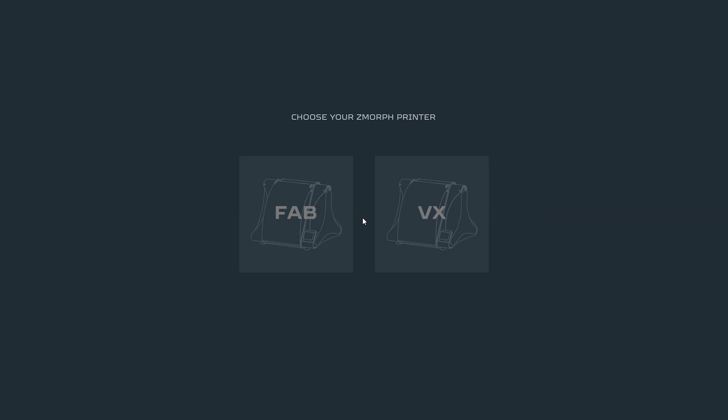Along with the premiere of Zmorph Fab, we also worked on upgrading our dedicated software Voxelizer into 3.0 version. It comes now not only with more user-friendly UI, but also with fixed stability and performance. Let's see how it works.

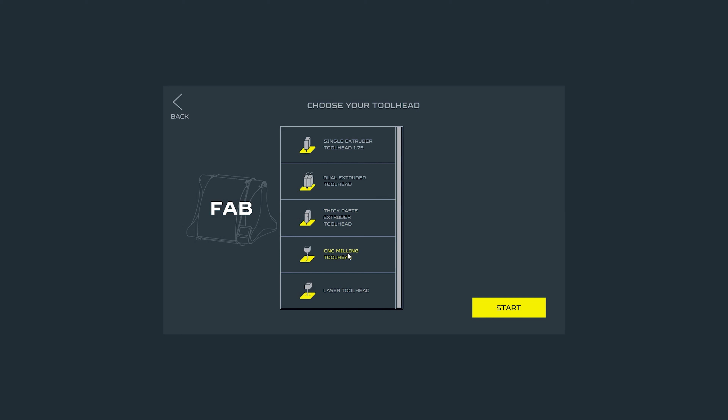We will start with selecting proper setup for Zmorph Fab. So first, select Zmorph Fab, then choose the toolhead from the list. In this situation, it will be CNC milling toolhead. And after that we can press start, since there are no additional options.

Now we are in the CNC milling workflow. First thing we always have to do is import the file that we want to work with. I will import the example file for this video.

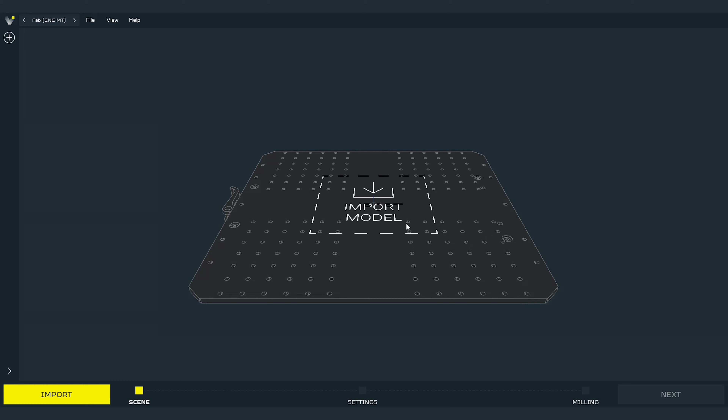This workflow can operate on 3D models, as well as on 2D files like DXF paths. To import the file, press the big button Import Model in the center of the workspace. This video will be about 3D milling operations, so I will import the STL file.

After loading the model, we can see that the model is in the wrong position. The software also tells us that the model is too big for this workspace. I need to transform the model.

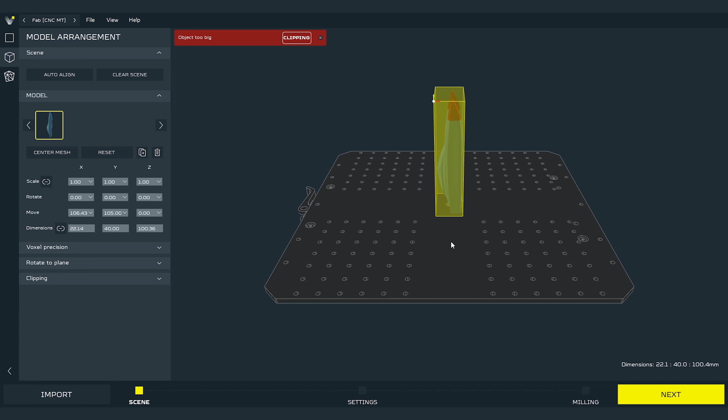I will rotate it to place it on the bottom face of the boat. To do that, I can use the Scene Mode transformation tools. Let's take a look at how it's placed now. I can grab and drag the model to the position I want it to be at.

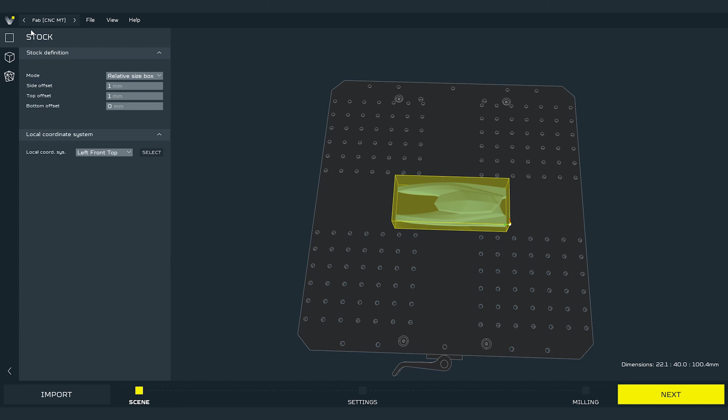Let's take a look at the stock, which is the yellow box around the model. This is a virtual representation of the material that we will mill to get the model. We can set the stock in two ways.

First is the relative box method. In this method, the box adapts to the size of the model. I will scale up the model now to show you how it works.

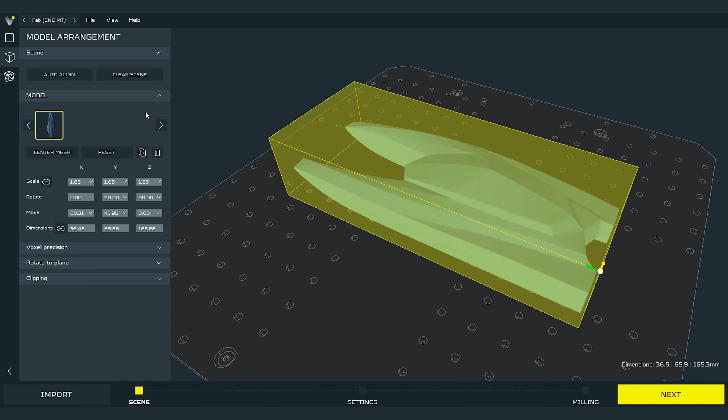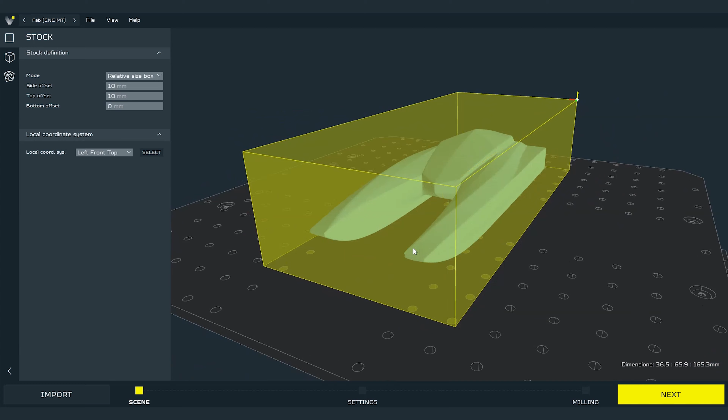You can also set an offset to add extra stock around the model. Let's scale the model back to the original size.

Second method is the fixed size box. In this method, we simply set the size of the stock by giving the values and setting the position of the model inside the stock.

I will change back to the relative stock since it fits me now.

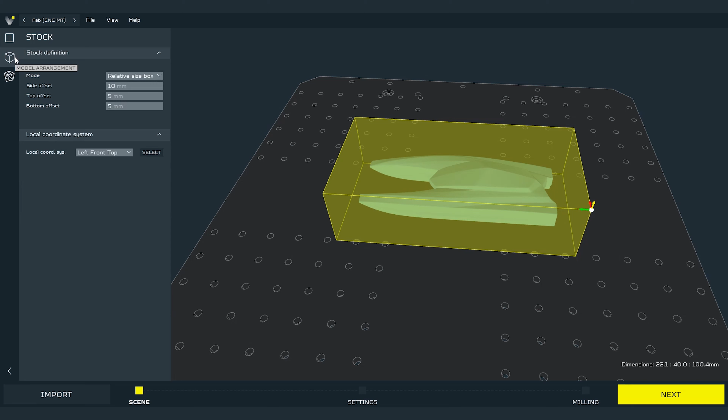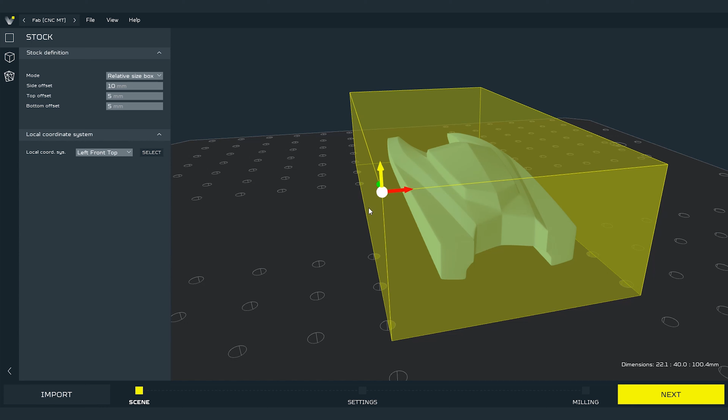Here, in the scene mode, we also set the so-called local coordinate system. This is nothing else than the spot where we will physically set the zero position of the toolhead before we start the work. In regular practice, we set the coordinate system to the left front top, and it will be set as shown on the video. Now, when everything is set, we can move on to the settings section.

Press the button named Next to proceed. This is the settings mode. Here we can set the settings for the 3D milling operation. Looking from the top of the settings column, the first parameter to set is stock material.

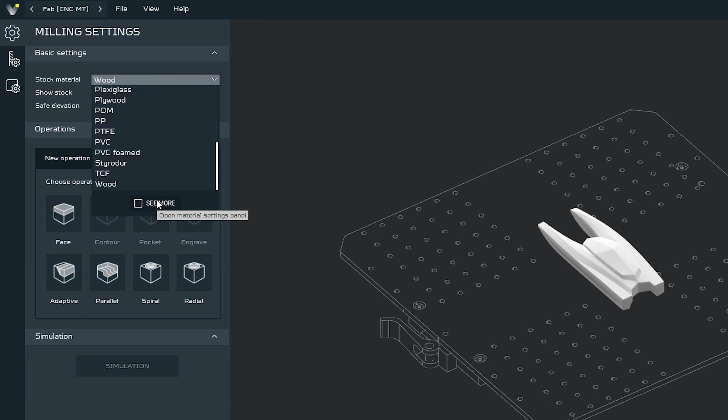In this parameter we set what kind of material we have mounted on our CNC work table. We can either choose from a wide range of preset materials or add our own by clicking See More at the bottom of the list. Here we can duplicate an existing preset or add a new one using the Add New Preset button.

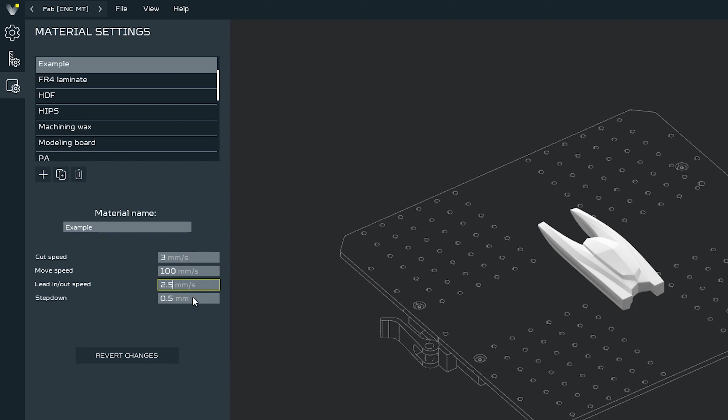We can name the preset and set our own parameters. Then we can go back to the settings and select the new preset from the list. But in this example I will go with the Wood preset, as I'm planning to mill in wood.

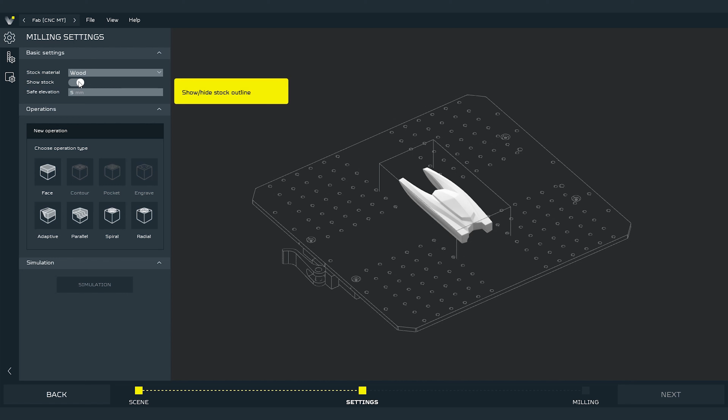Next parameter is a toggle option that shows or hides an outline of our stock material. Turning it on might help us visualize what is going to happen during the milling operations.

Next one is safe elevation. It tells the toolhead how much it has to rise for jog operations to make sure it won't hit anything on the workspace during movement. I will leave it as default for safety.

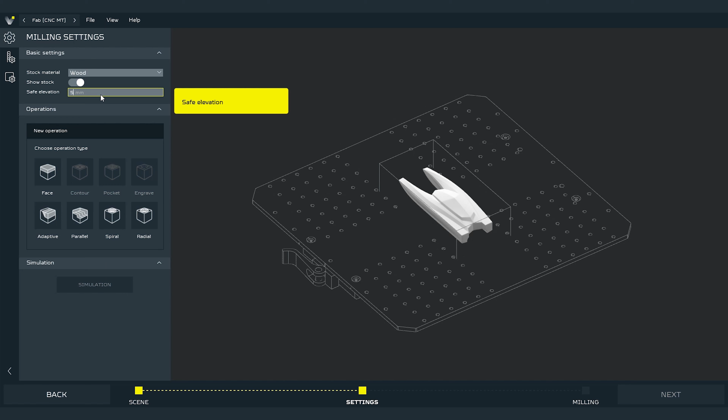First milling operation that we will use is face milling. This operation allows us to prepare the raw stock surface for machining. It removes material from the top surface of the stock to the top of the model to remove roughness.

First, I choose the operation, then I select the face contour. In this example, it will be the stock, and we press continue. New settings will appear; we will leave the starting height and final depth as they are.

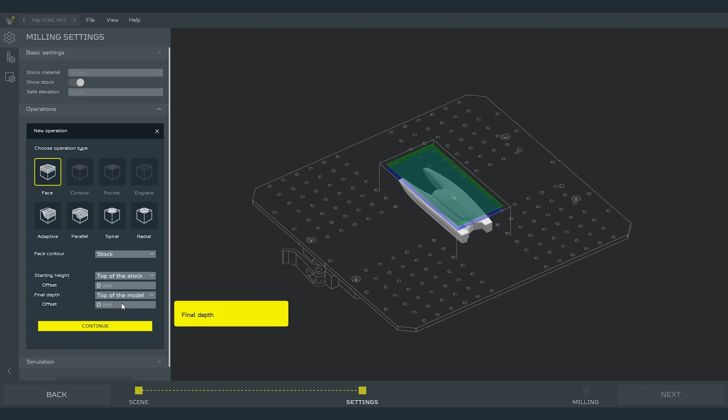Before we proceed, we can take a closer look at the model. The green rectangle is the start of the process and the blue one is the end height of the process. In this kind of operation, all material between those two rectangles will be removed.

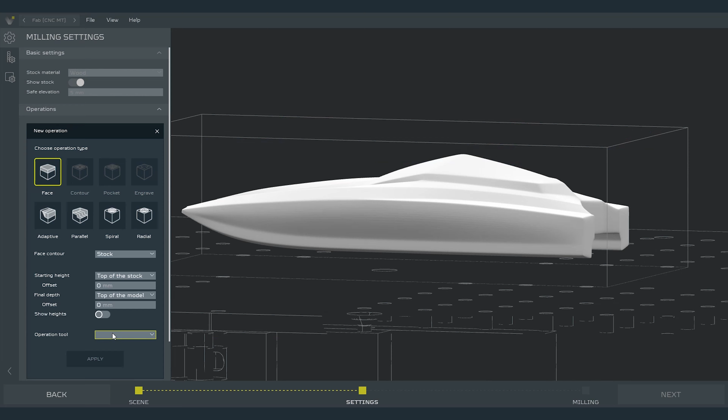Press continue. After that, we have to select the end mill that we'll use for this operation. After selecting it, the software will show us the toolpath. Red lines are where the milling will happen, and the blue ones are the jog movement.

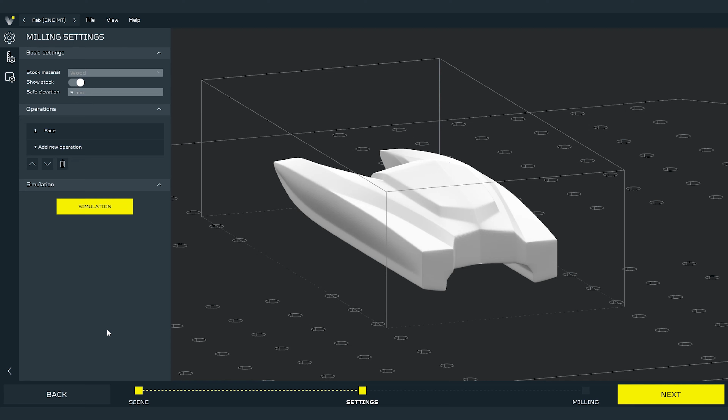We'll also get some more parameters that we can set, but for this example, we will stay with the default ones. When everything is set, simply press apply. Now the operation will appear on the operations list. Clicking on it will show us how it looks by the toolpaths.

We can add another operation by clicking the Add New Operation button. Now I will choose Adaptive as the next operation. This operation is very effective in clearing the stock. The process is divided into two stages: roughing milling to remove most of the material, and then the final milling to give us a good fine quality surface on the milled model.

Let's select it and then select the adaptive contour to stock and press continue. Now we'll set the starting height and final depth. Remember that we removed the material from the top to the model with the face milling operation. So we set the starting height to the top of the model. Now we can set the final depth to the bottom of the model.

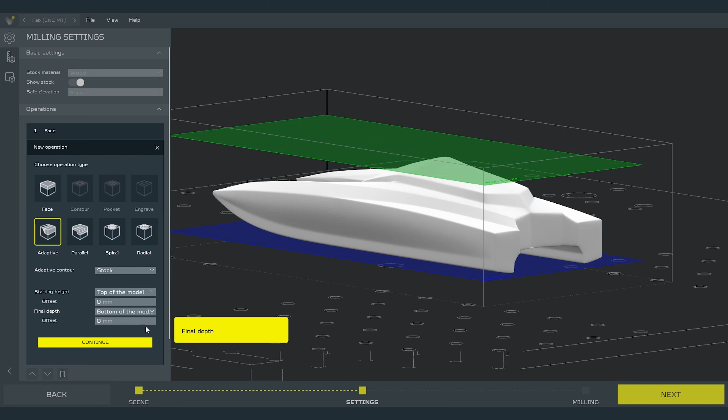Now press continue. Then select the operation tool. After selecting it, we will get the toolpath for this operation with this tool. For new users, this might look messy and hard to understand, but after a few millings it will get more clear. In this operation we can see that it's also made in layers. We call that step down.

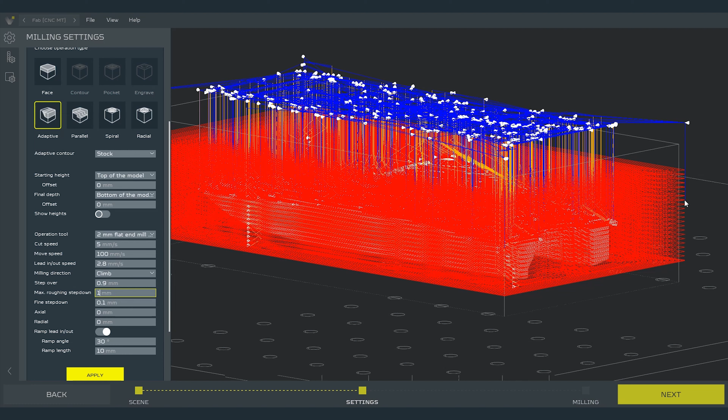By default, each step down is 1 mm at max. While milling softwood, we can safely change it to 2 mm. There will be fewer steps and milling will end faster, with the same result. We can move on and press apply to add the operation to the list.

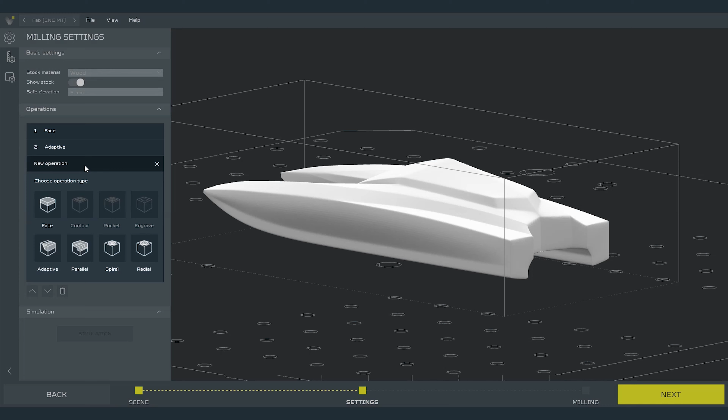Now we will use a parallel milling operation. This is the operation that we mainly use as a finish operation after adaptive milling. Select it and then select the surface to cut. It will be our entire boat. Select it and press done, then continue.

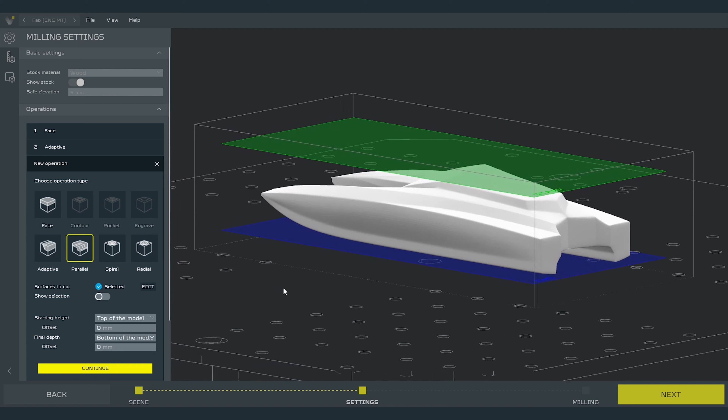Now we select the starting height and final depth. It will be the same as in the operation before. Starting height as top of the model and final depth as bottom of the model. Now press continue. Now select the operation tool.

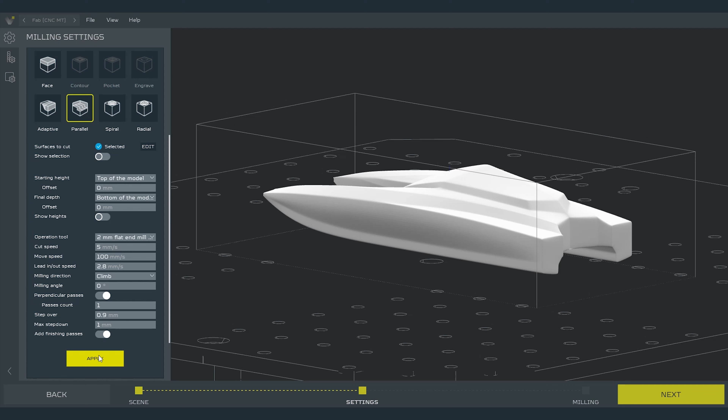This operation takes a bit of time before the software generates the paths. We will apply it now and wait for the software to generate them. In the operation list we can see the parallel operation and the progress bar. We have to wait till the software finishes. When it is done, we can select the operation and see how it looks.

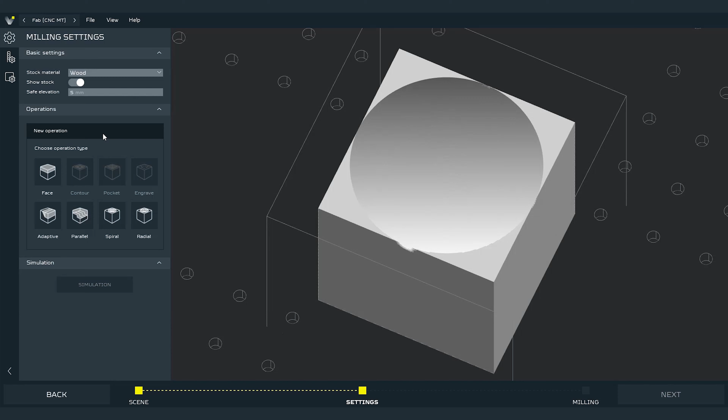For the next operation, I have to change the example model. The next two operations need a model where the software can detect the arcs or circles to set the center point. This simple example model lets me show you how to use those operations. Select the spiral operation and press the select button for the center point.

On the model you can see there is a spherical pocket. The software has already set the center point of this pocket and marked it as a black point. I have to select this point and press done. Now I press continue. Now I set the starting height.

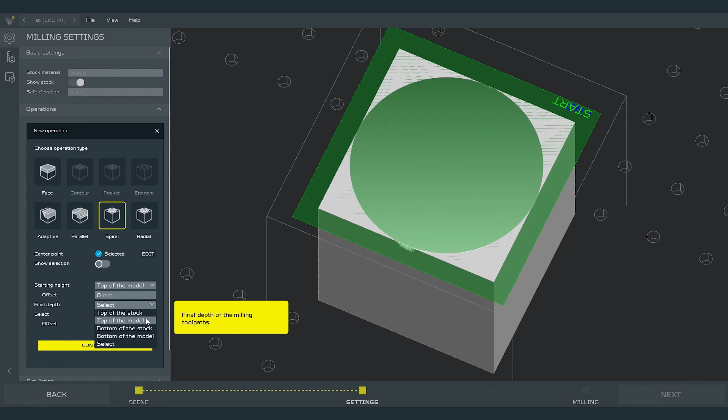Normally, I would do the face milling first, to remove the material between the stock and the model, but since this is just an example, I can skip it, so I will choose the top of the model as our starting height. The final depth is a little bit tricky here. Let's choose top of the model as well and set the offset to minus 25 mm, since I know that the pocket will have a radius of 25 mm.

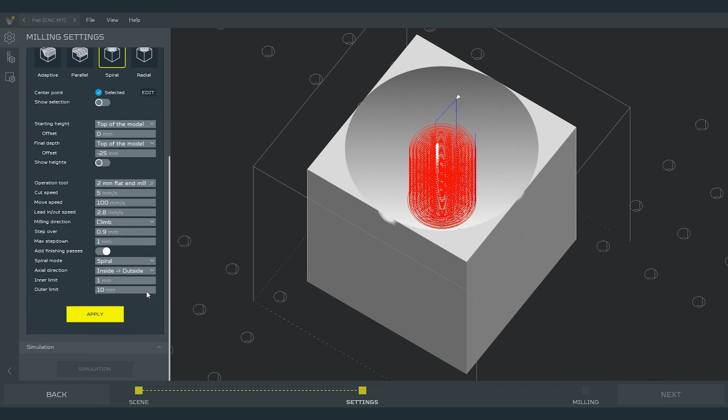Now, press continue. Select the operation tool. Now you will see the toolpath, but it does not cover the whole pocket. It is because we have to change the default setting called outer limit. It defines how far from the center point the milling will go. If I change it to 25 mm, the same as the radius, the milling will cover the whole pocket.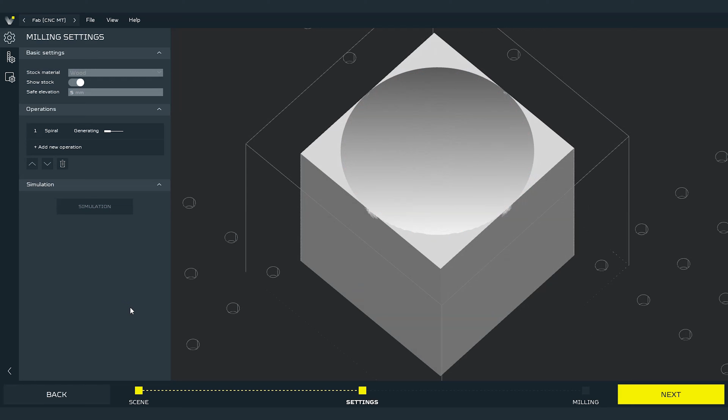From the top we can see how the milling will go. Press apply to add the operation. Now, let's move on to the next and final operation, radial milling. In this operation, we also have to choose the center point as in the operation before. Select it and press continue.

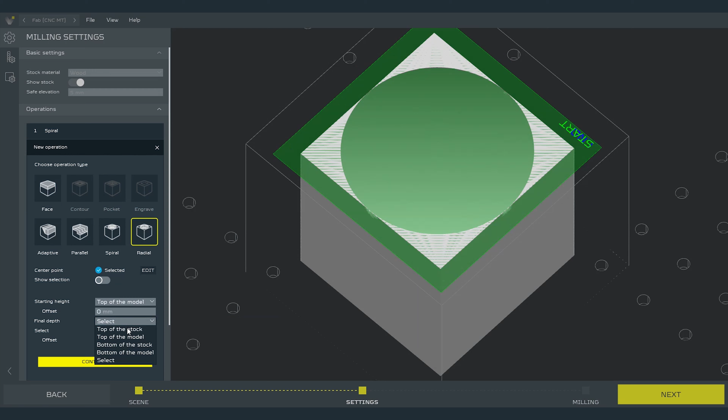Now, we select the starting height and final depth the same as before, top of the model in both positions, and we set minus 25 mm of offset in final depth. Now, press continue. Choose the operation tool. Now, in this operation, we also have to select the range of milling. So, we have to set the outer limit to 25 mm.

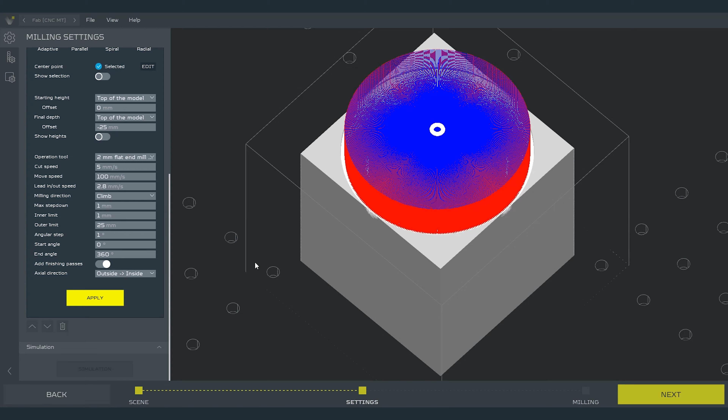After a while, we'll see the result. Another thing that we can set is the axial direction, if we want to mill from the inside to outside or the opposite. Let's apply the operation.

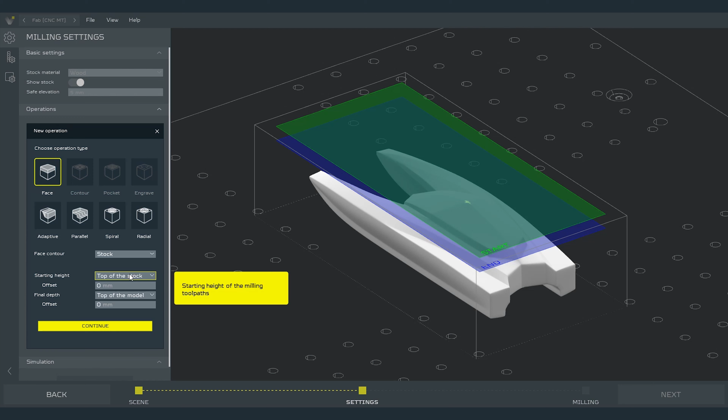Now I will load the boat again, and we will see how the simulation of the milling operation works. I will add a face milling operation, from the top of the stock to the top of the model. I will change the max step down to 2 mm. In softwood, it is a safe value.

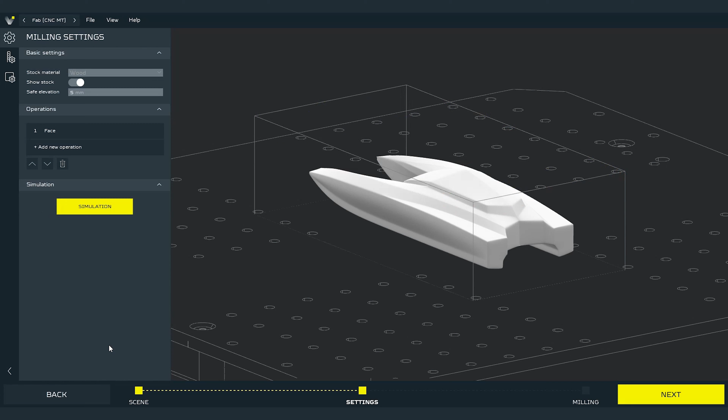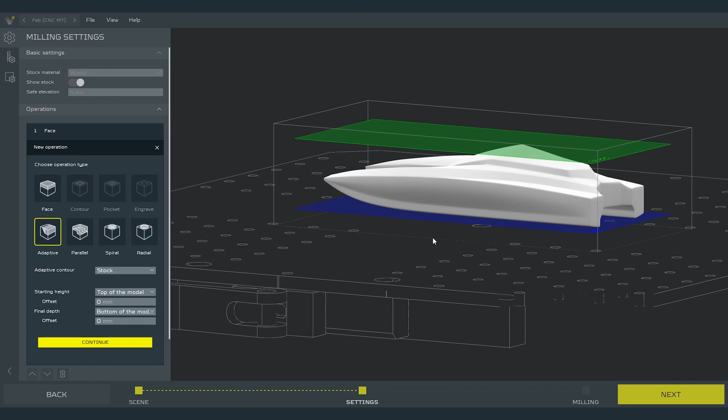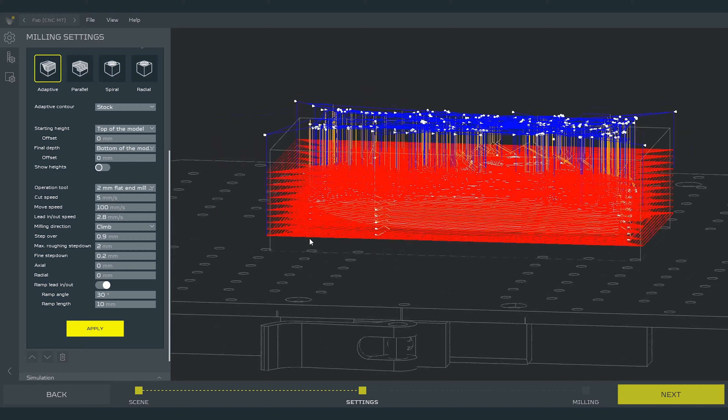Let's apply the operation and add a new one, which is adaptive milling. Select the adaptive contour as stock. Start is top of the model and final depth is the bottom of the model. Now, press continue. Here, I will also change the max roughing step down to 2 mm. Now I will apply the operation.

Now I can go to simulation. After we enter it, the software will automatically generate the visualization of how the part will look after milling. We can also see the animation of the entire milling. To see it, press the play button.

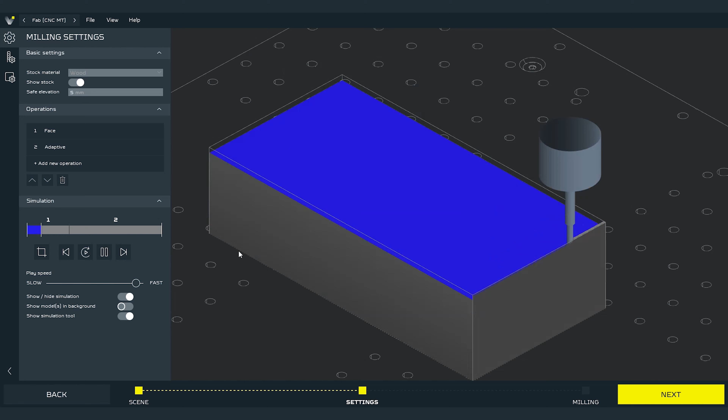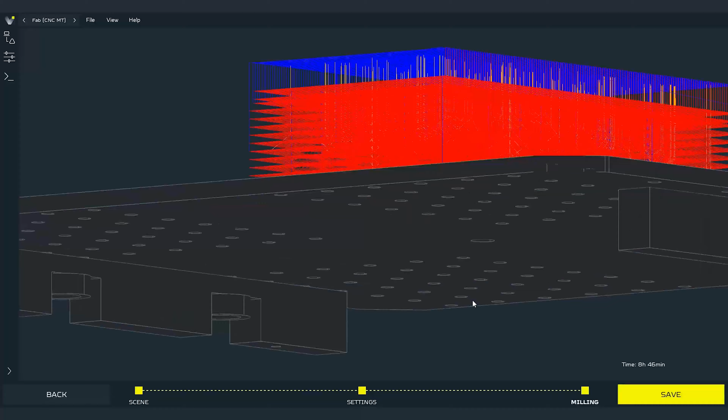Play speed can also be adjusted. If we are happy with the process and the outcome, all that is left is to press next. After the G-code is ready, we can save it on an SD card and play it on the machine.